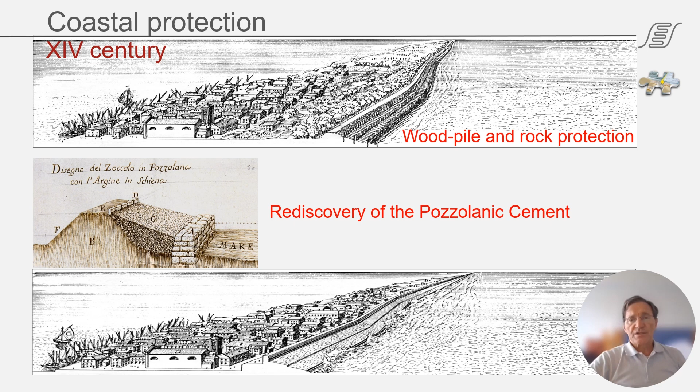Not only the rivers have been modified, but also the barrier islands, at the beginning with wood piles, but then using more robust systems with stones and pozzolanic cement. In 1700, Zendrini rediscovered the pozzolanic cement, in use since Roman time, from a travel to Amsterdam.

The terrible flooding of the 12th of November 2019, before the barrier was in operation, caused huge damage and put a lot of pressure on the commissioner to put the barrier in operation. My organization contributed, raising concern among the population for having the barrier operated, with 15,000 people that gave their own signature.

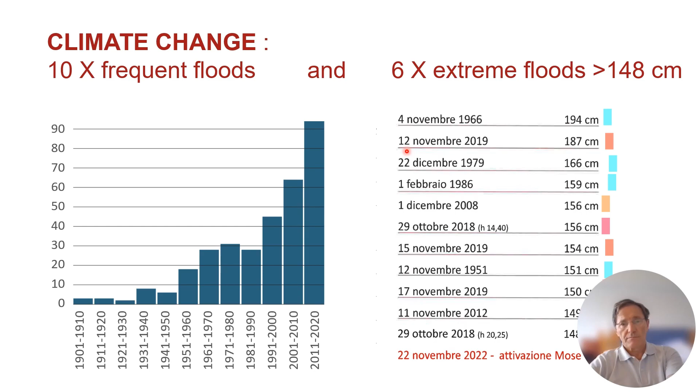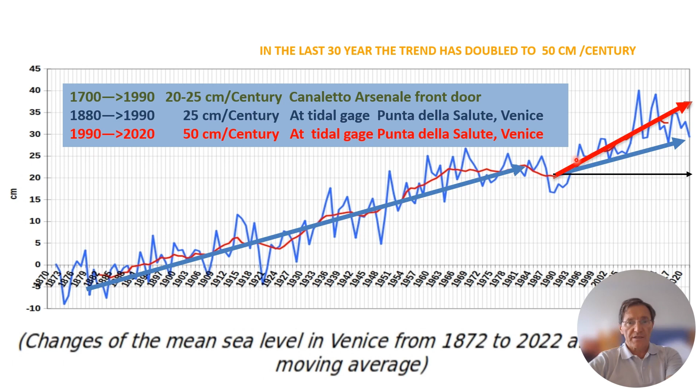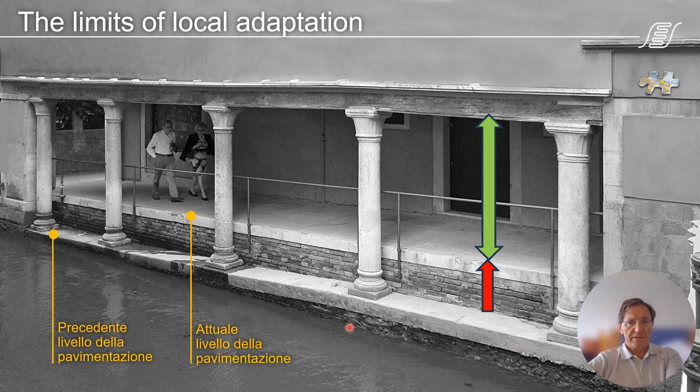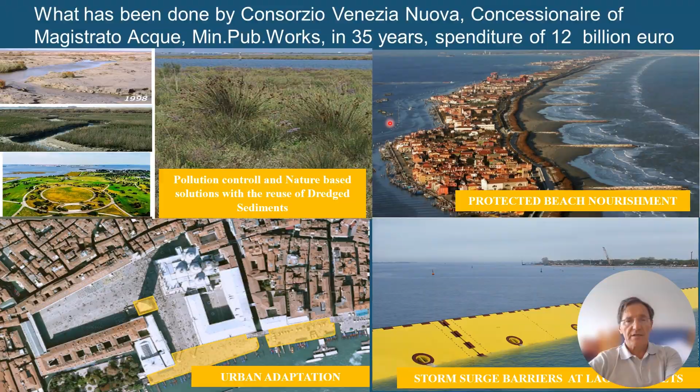Adaptation of the urban settlement is limited. Since 1400, this canal bank was elevated, you see here. And so the solution is the closure of the barrier, together with the local protection and the nature-based solution of reinforcing the littoral, salt marshes inside the lagoon, and the tidal flats, reusing dredged sediment. The local protection is limited because we cannot modify too much the view of the historical city, and that's why we need to close the barrier at the lagoon inlets.

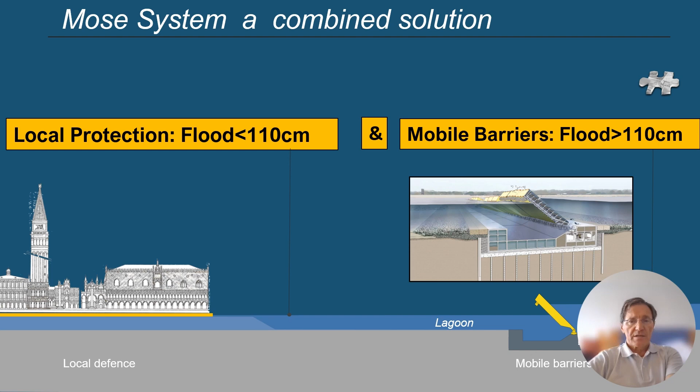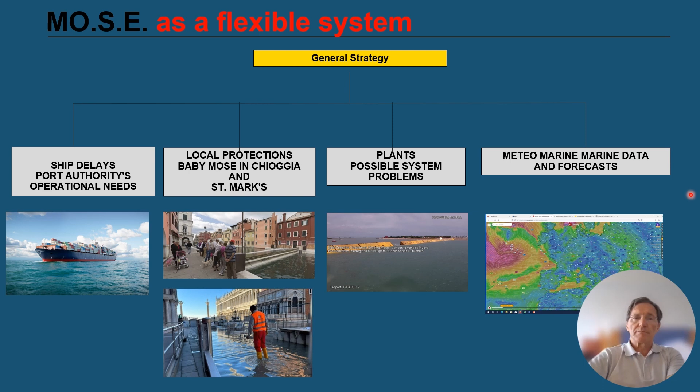It's a flexible system because it allows navigation. It is locally protected, so it need not be operated so frequently because there are local protections. It's not only to close on and off, but we can also close partially the barrier, one inlet instead of the others, and also subsets of flaps. We can use that not only to reduce the number of total closures and the impact on the port activity, but also to improve the water quality and the sediment condition in the lagoon, the sediments that are nourishing the salt marshes. Here are some examples of on-off use.

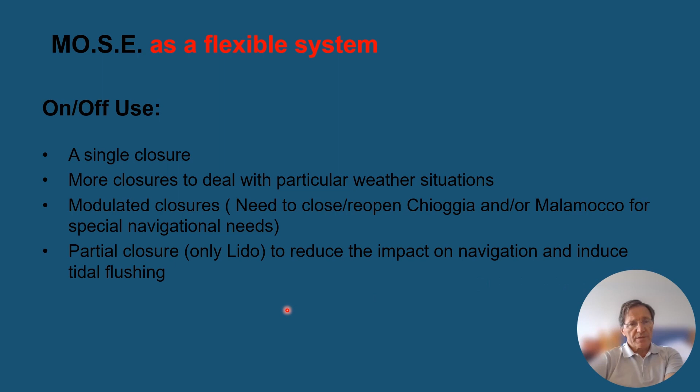A single closure, more closures to deal with a particular weather condition, need to close or open Chioggia and Malamocco for special navigational needs, or partial closure only of Lido to reduce the impact on navigation and to induce a tidal flushing, so for water quality reasons. So we can prevent pollution by limiting the spillage of pollutants, or have an environmental use inducing a tidal flushing during an anoxic period in summer, reduce the sediment loss from tidal flats to channels and the sea by limiting the current, or facilitating the wetland process of accretion and the bird nesting during the reproductive season.

This is an example of unexpected novelties, the formation of this new island in the Bacan, the area in which the Venetians go for swimming and collecting clams. This was totally unexpected and is due to the lack of overtopping of the summer deposits that during the winter can continue to grow, accreting by the interception of plant and other organic debris. But the very actors, the very makers of this are the microbial mats.

So we can provide these preliminary remarks: Venice is protected from floods in time of climate change and the quality of the environment has been improved. The system exhibits a great flexibility with the possibility to be operated with partial closure or total closure for environmental and social benefit. To get these results, there was the need of developing multidisciplinary knowledge and experience in managing the socio-ecological system.

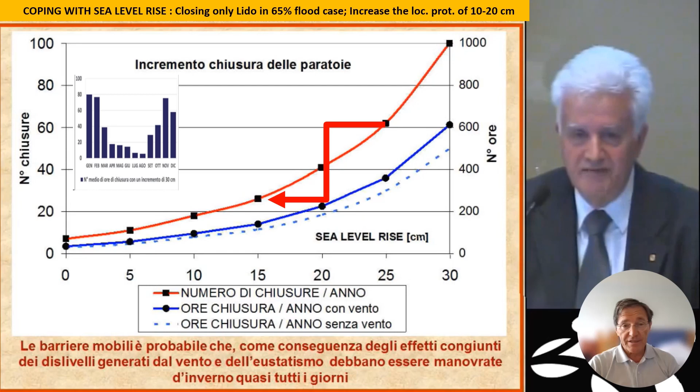The barrier will become sooner or later useless if sea level is rising, because there will be no low tide to start operating the barrier. And this is a problem. A lot of opponents of the barriers used this argument, saying that if there is a sea level rise, very rapidly the Mose will become obsolete. But this is not the proper argument, because if there is a sea level rise, we need more and more to close the lagoon. And if we have the Mose, as it is the case, the benefits are much larger than the cost.

Last year, at the international conference held in Venice on sea level rise, we had the chance to stress the point that if we want to continue to adapt in Venice, we need participation of the local people. The local people have to become the peer review of the process of adaptation. In order to reach this result, we need to improve the communication and sharing of knowledge among the people that have the experience and the lay people, the citizens. Who are the citizens of Venice? All the world, all the people that are interested and love Venice.

This is the only way to safeguard the city in the future and to reduce the damages of mass tourism that is bringing great problems in terms of local identity and drift toward the Las Veganization, as this process was called: losing the local identity, the local jobs and business, with rapid transformation that makes the city more and more artificial and with a deep lack of artisans, fishermen, people strictly connected to the natural resources.

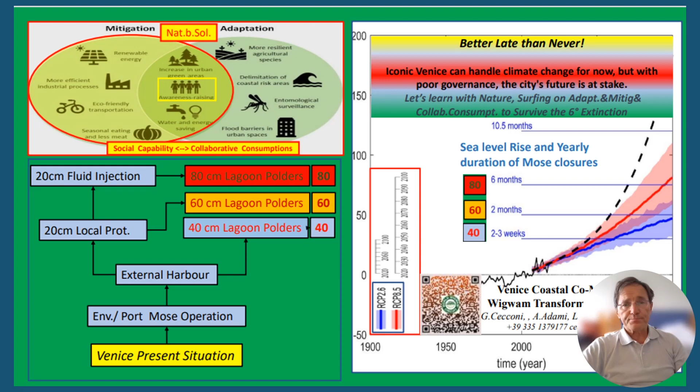This is the solution that Professor Adami and I brought forward last year to the International Conference on Sea Level Rise in Venice, in San Giovanni Evangelista. It is about transforming Venice into a polder, a coastal lake, with this boundary at an elevation of 3 meters that can be adapted to 4 meters, 5 meters, whatever the needs will be in future, with the production of electricity, continuous flushing of the lagoon with 3 pumps, and mainly the beneficial use of this dike for many, many services.

The local School of Architecture produced this utopia of Venice with beaches all around the city, wetland inside, and green park all over the edges, with navigation locks and exchange of water with the nearby system. But this is too complicated.

More simply, what we propose is to have a power plant and 3 pumping stations, and have a local navigation that is connected with external navigation with ramps that can very rapidly transfer the ships from inside to outside, because the transport system will be totally modified by the possibility to move along the perimeter, avoiding the impact of traffic inside the so-called Lake of Venice.

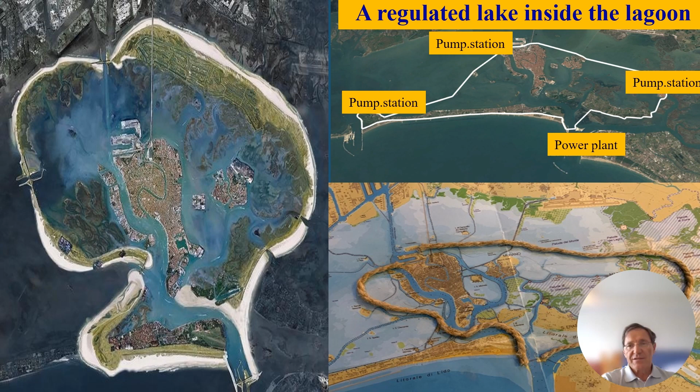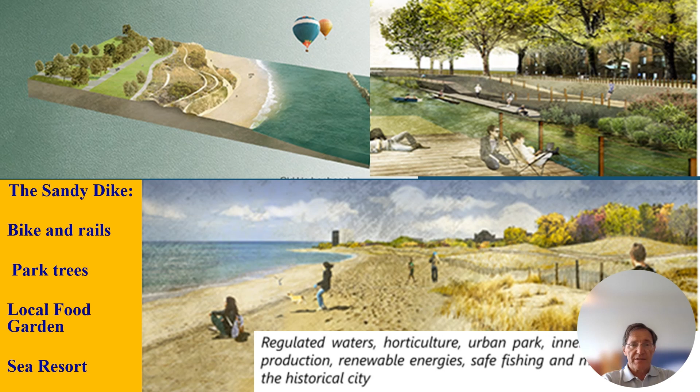And this will allow us to swim again in the city of Venice, as it was the case in the past, and lets the city marble shine again, because we can remove all the structures that have been added in the last 300 years, and the green line will be controlled 1 meter below the present mean sea level.

First of all, adaptation of the soil with these compaction piles, adaptation of the bottom with the bottom protection to avoid scouring in case one flap is not able to enter into operation, with a great current of 6 meters per second that are produced in the bottom. We have also the flexibility adaptation to the tidal flow.

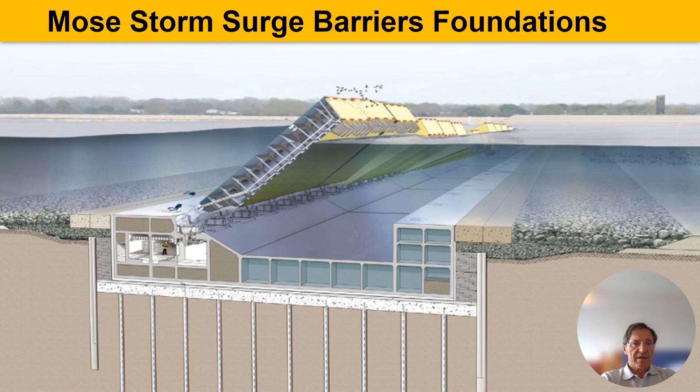When not in use, the barrier will lay on the bottom, and there is a very high level of redundancy to improve the safety of the system, the reliability of the system, with the possibility of raising each flap with 4 independent replicated items.

This is how it is operated, just injecting this amount of air in this upper chamber. The gate is able to rise. This volume produces a lift of 300 tons. When all the water is removed, it can maintain 3 meters of water at sea with 0 or 80 centimeters of water in the lagoon.

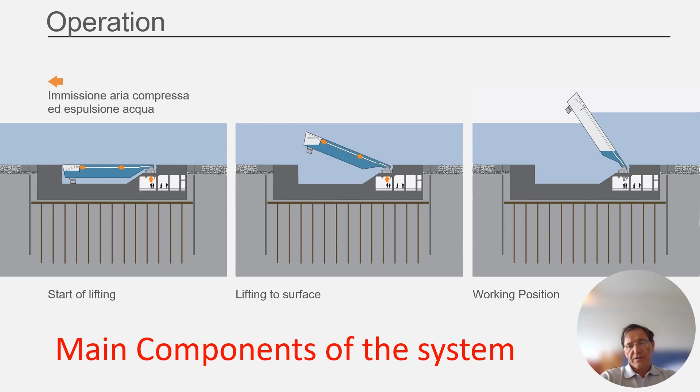If sea level will increase, this flap will exhibit overtopping, partial overtopping, but this will provide a long time of protection also for 1 or 2 hours of water that exceed the 4 meters. Here you see the combination.

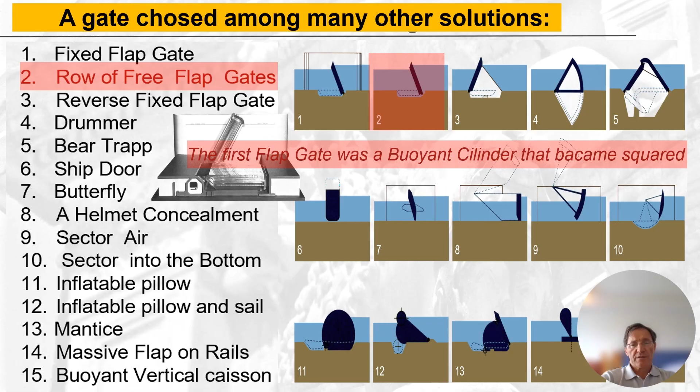The solution is a row of flap gates. The others were considered but discarded because of the impact and the constraints. The other barriers in the world are not so elegant as the Mose storm surge barrier, I must say. Four barriers, 78 flaps, 1.6 kilometers.

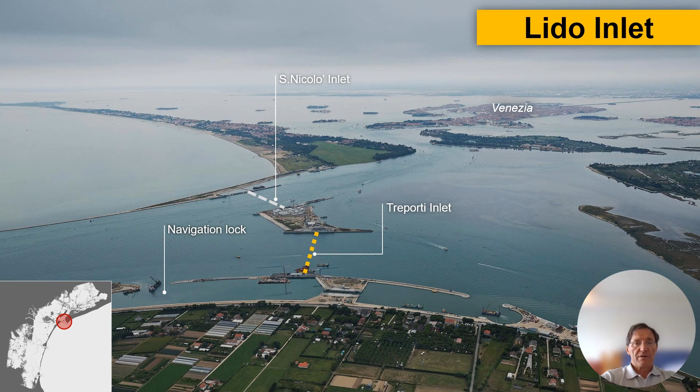Lido, we have a navigation lock for hovercraft and small vessels that have to come on time in and out of Venice. Here we have the navigation lock. There is, at the moment, the completion work by the end of the year, but criticism about the possibility for the large container ships to enter. Also, the cruise ships have difficulties in going through this inlet.

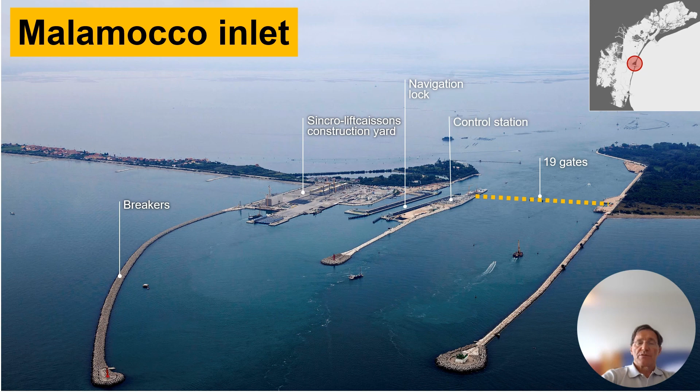So the navigation will be, in this condition, impacted by the closure of the barrier. And the flexibility of the barrier will be put in action to maintain navigation through the Malamocco Inlet, closing Lido and Chioggia as much as possible and earlier to avoid the total closure of Malamocco. Chioggia, there is a fishing harbor with 2 navigation locks to allow the 100 fishing boats to go to Chioggia.

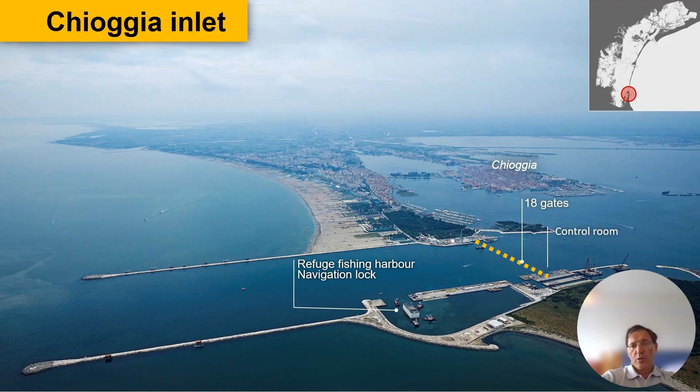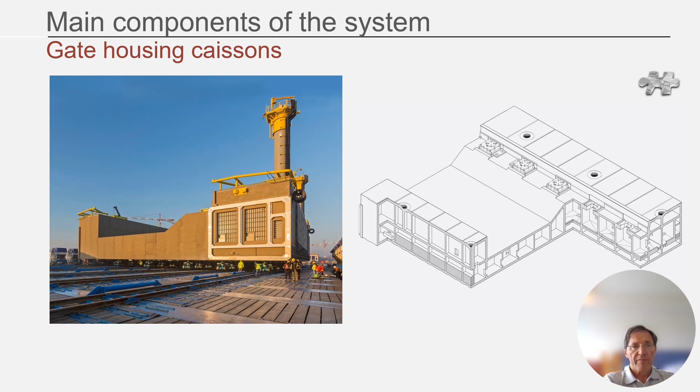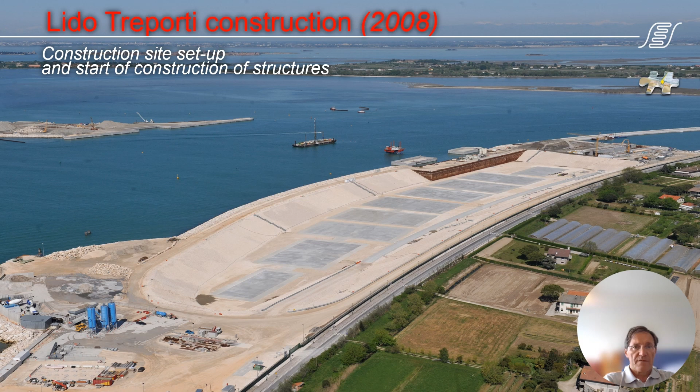Very important item, the male-female connectors that will fix the flap to the concrete. The caissons are immersed in the tunnels, the foundation, and the dry dock of Cavallino. Coupling, and the maintenance barge called Jack-Up.

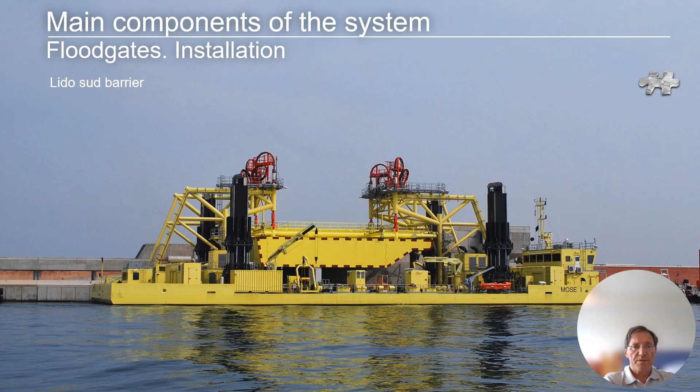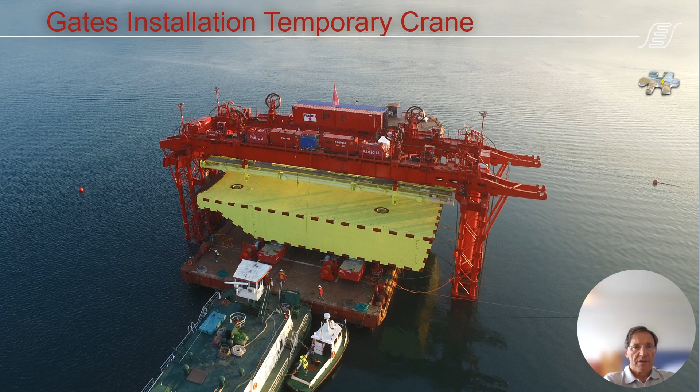And here you can see the rubber and the steel that will connect the lateral wall with the longitudinal tunnel, just using the pneumatic pressure. Temporary installation device. Before the completion of the jack-up, this temporary installation crane was very effective. This is on the basis of the experience gained during the last 3 years.

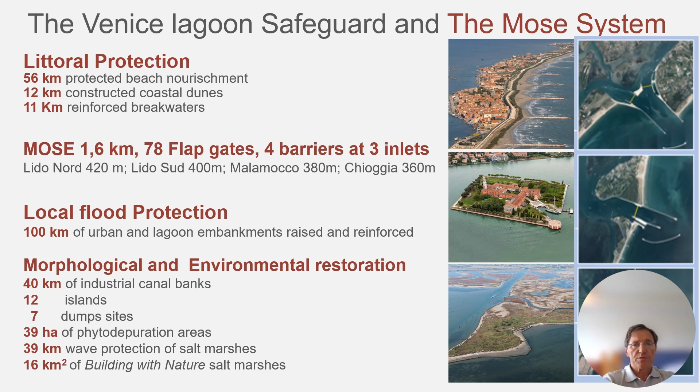MOSE system, what has been done, you can see big numbers. This presentation will be distributed, so I don't go through all these details. What I want to say, implemented with the protection of the littoral, with the so-called protective beach nourishment, with 8 million cubic meters of sand that was, most of it, dredged at sea from a borrow area, and also from the deposit at the entrance of Lido Inlet.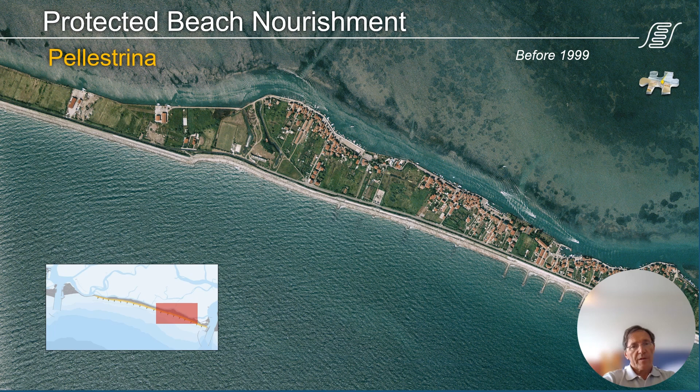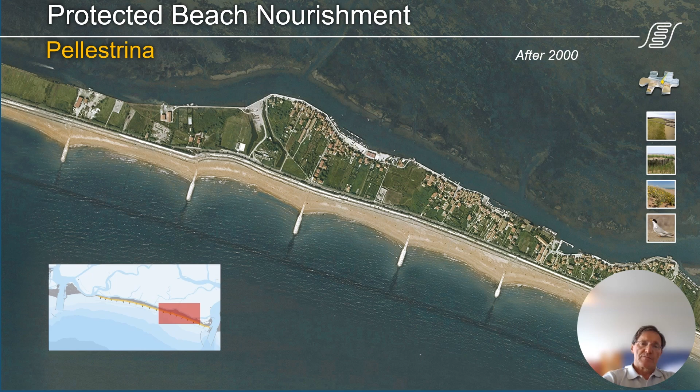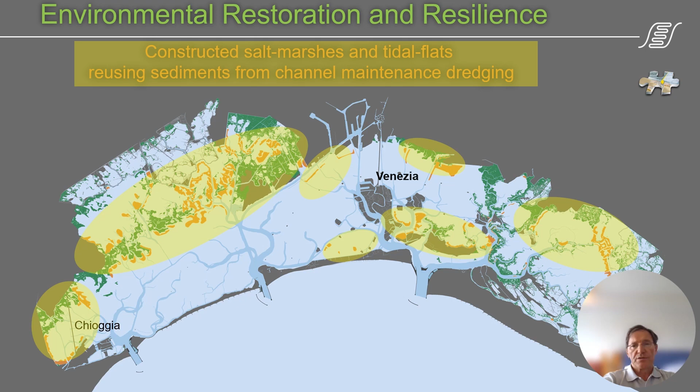This is an example of the coastal protection, 270 meters. In 1 month, we were able to put this volume of sand with the dredger. Protection of the islands, construction of salt marshes. These are the areas in which the artificial salt marshes have been constructed. Very simple system, just with 5-year time, nature keeps this deposit of mud and sand at the proper elevation.

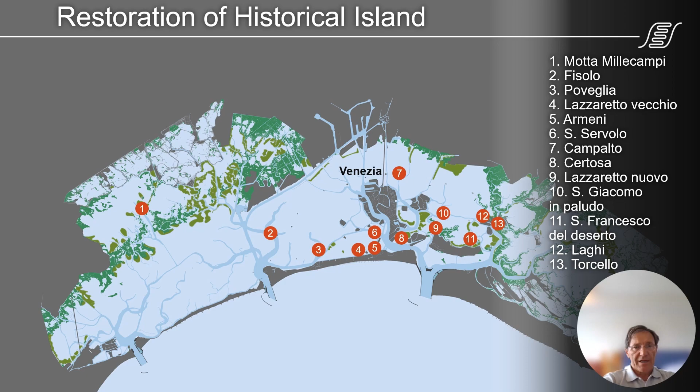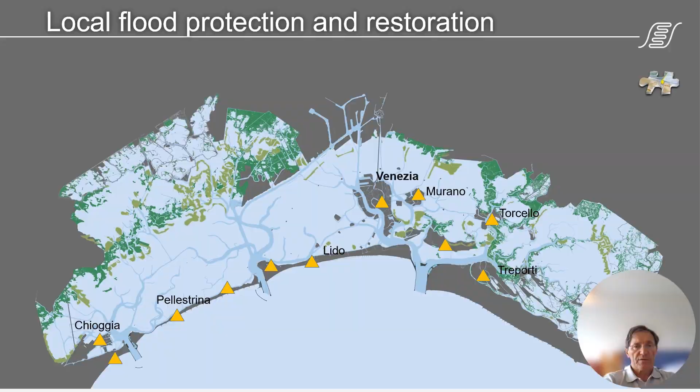Restoration of historical islands, for example, and the protection of abandoned islands of the past. This also is an important work. Local protection to reduce the number of closures of the barrier. San Marco, a good example. San Marco has been protected, the church, with this glass wall, and now the protection of the entire square is underway till the elevation of 110, because San Marco Square gets flooded at 70 centimeters, so more than 100 times per year.

Venice continues to be the oldest city of the future, practicing formal and informal exchanges with other water cities for environmental restoration and disaster risk reduction. This knowledge is also available both by institutional exchanges and by local community interaction through adaptive hospitality. We expect that this exercise will improve resilience and adaptation in the future.